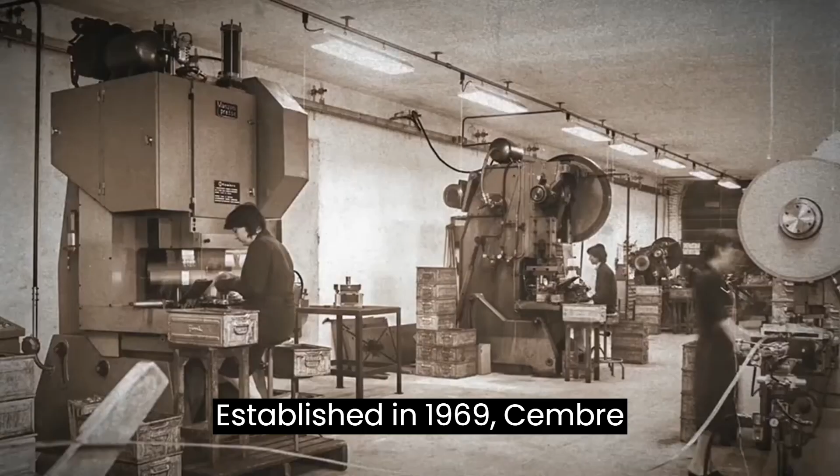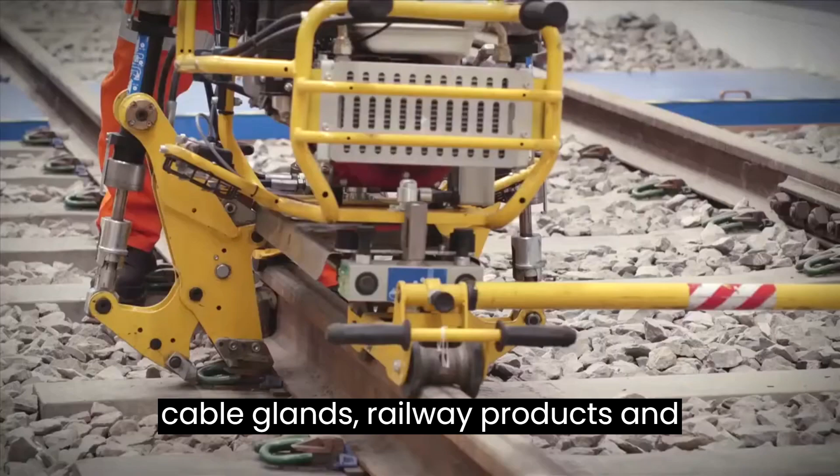Established in 1969, Cembre is today Europe's leading manufacturer of electrical compression connectors and related installation tools. The manufacturing program also includes cable glands, railway products and accessories, and industrial marking solutions.

The Italian plant, with its production units and offices, covers an area of 51,000 square meters on a total land area of 121,000 square meters. Cembre has been listed on the Milan Stock Exchange since 1997.

In addition to the plant in Brescia, a second design and manufacturing facility is situated near Birmingham, the second largest UK city in the heart of the Midlands.

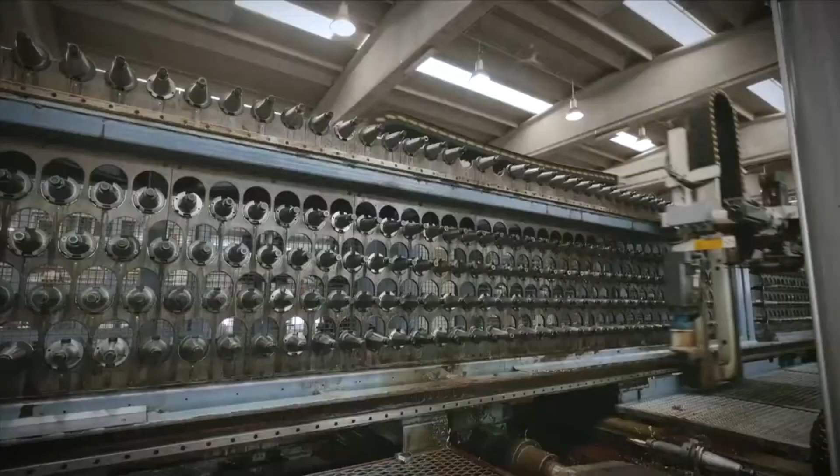Cembre Limited manufactures mainly for the national market. However, its high flexibility provides for all the group's subsidiary companies.

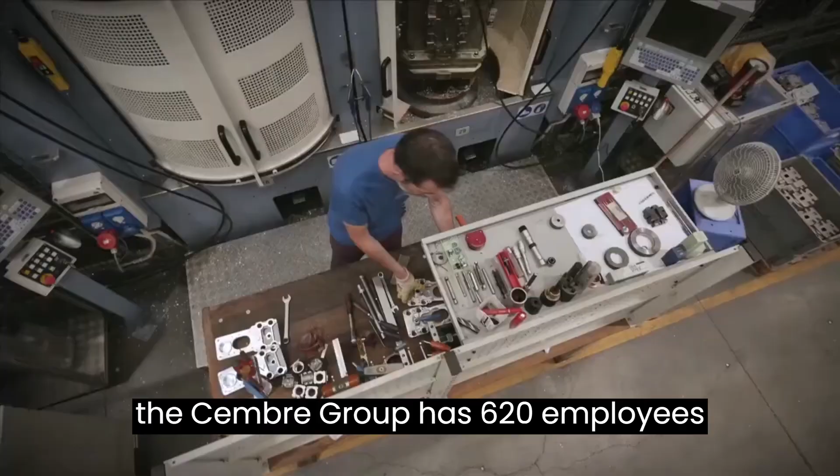Today, the Cembre Group has 620 employees in 7 companies, the other 5 being trading subsidiaries located in Paris, Madrid, Munich, Oslo, and Edison, New Jersey, USA. The headquarters in Brescia coordinates the business operations of the whole group.

Cembre engineers, designers and technicians work to produce not only the company's products, but also the equipment and machinery that makes them.

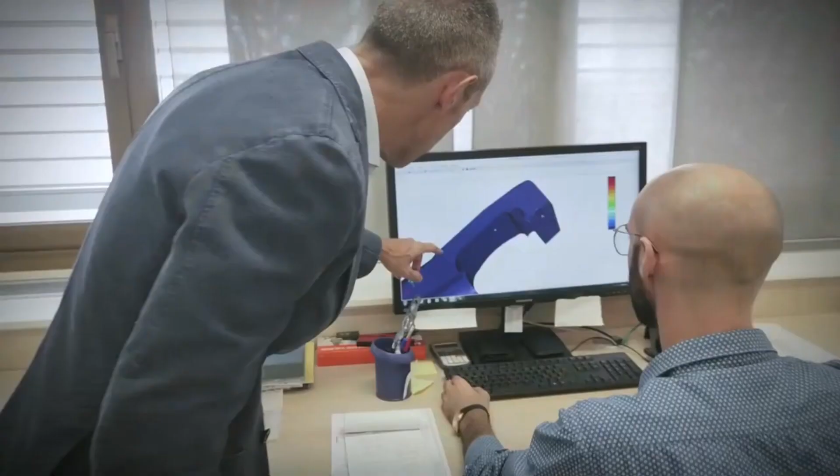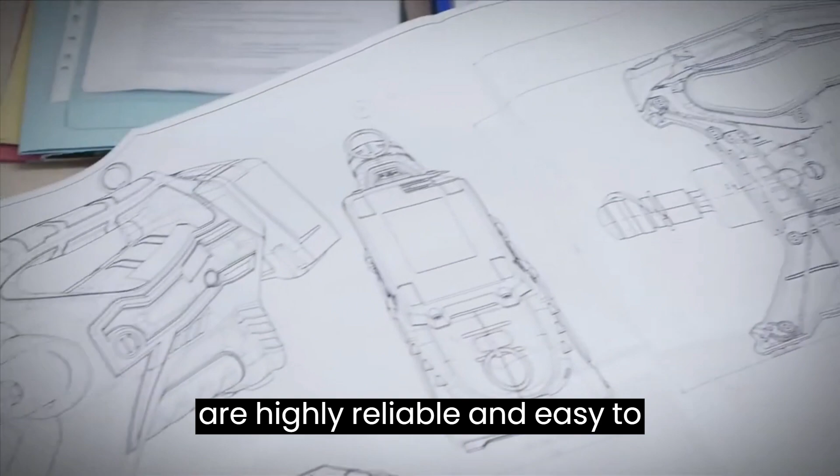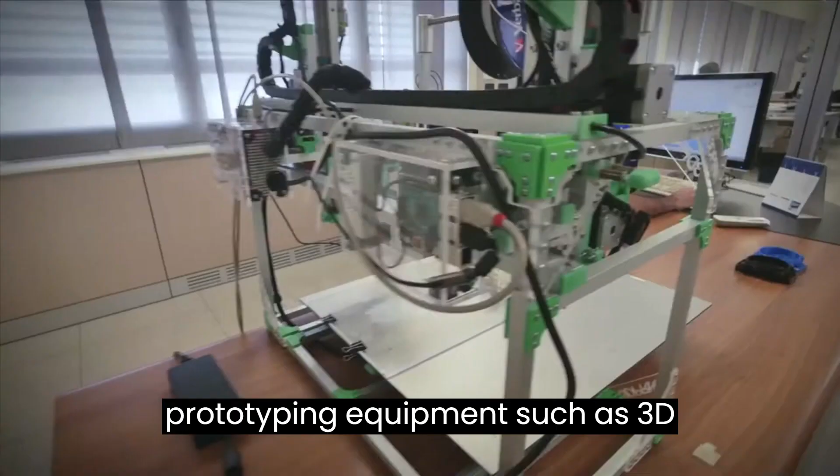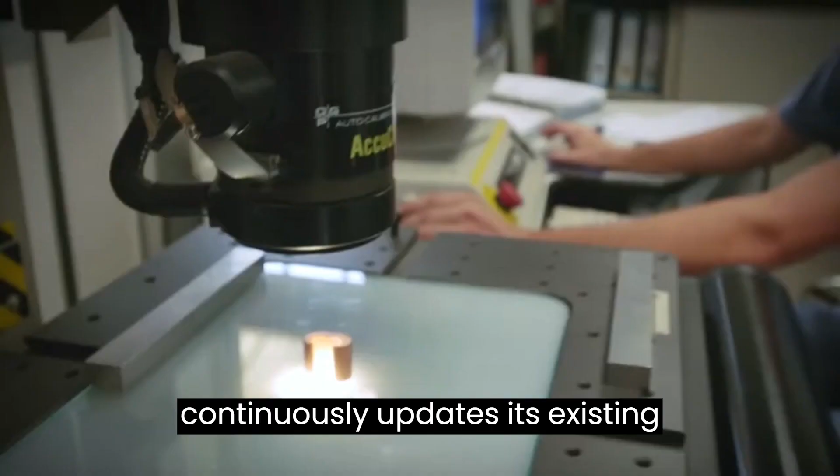Cembre's mission is the implementation of technologically advanced products that are highly reliable and easy to use. Cembre designers and technicians make full use of three-dimensional CAD, finite element analysis systems, and prototyping equipment, such as 3D printers. In addition to research activities focused mainly on developing innovative products for sectors with the highest growth potential, Cembre continuously updates its existing products to make them easier to use and more efficient in their performance standards.

98% of our sales turnover is based on our own product sale. We manufacture the first automatic rail disc saw machine.

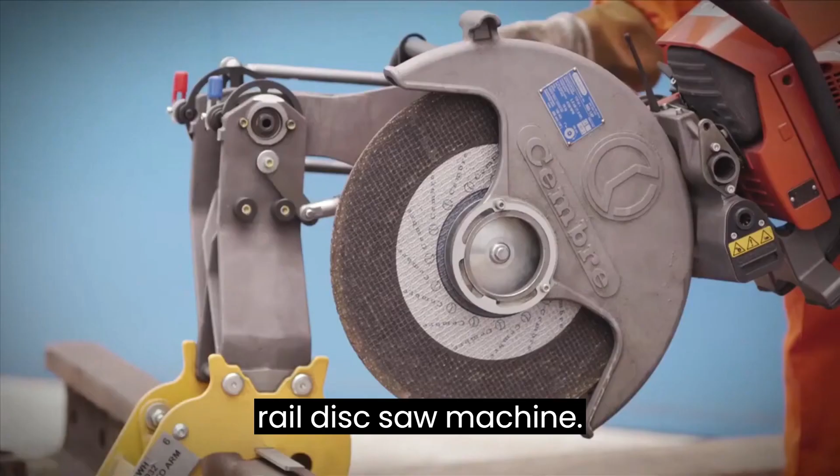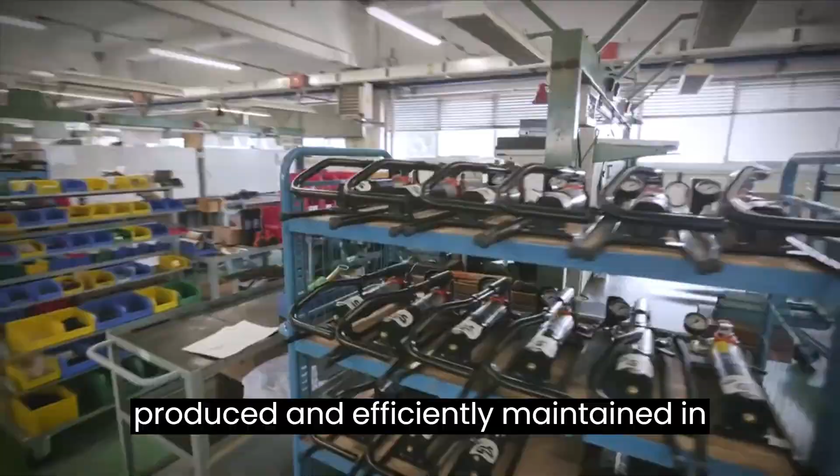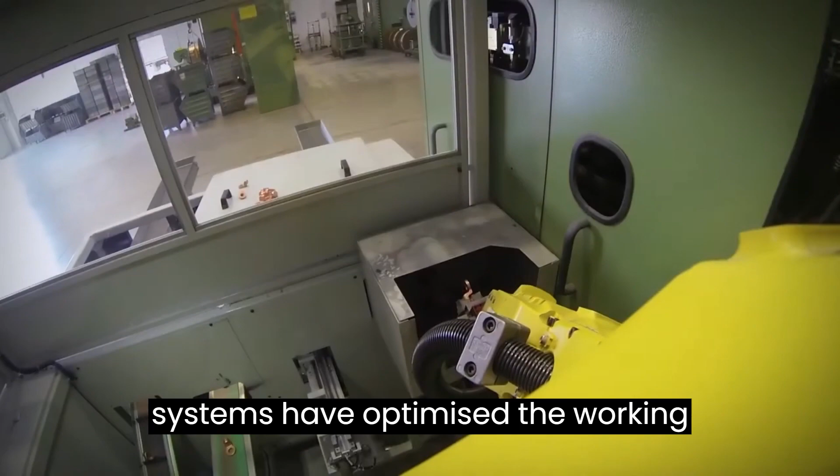Dedicated manufacturing equipment is produced and efficiently maintained in best condition in the tooling department. The study and implementation of dedicated workpiece positioning and handling systems have optimized the working processes, reducing time and costs and ensuring high-quality standards.

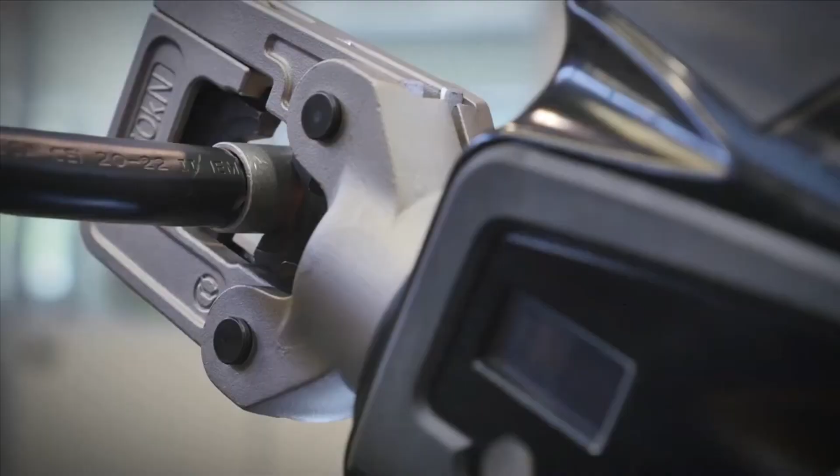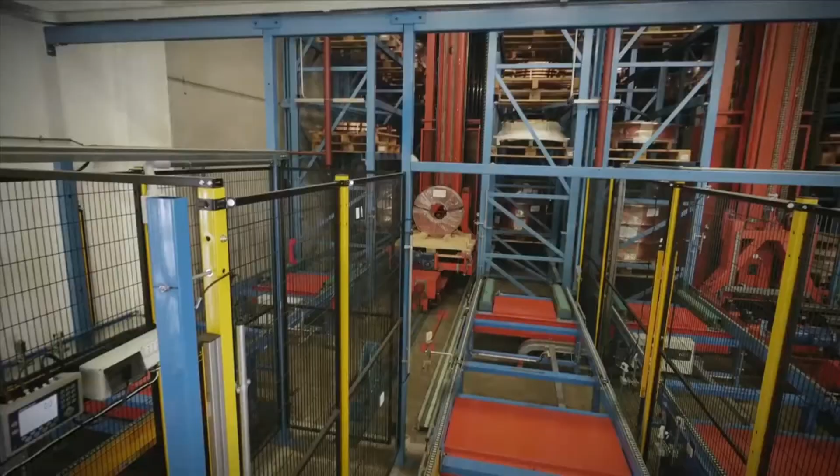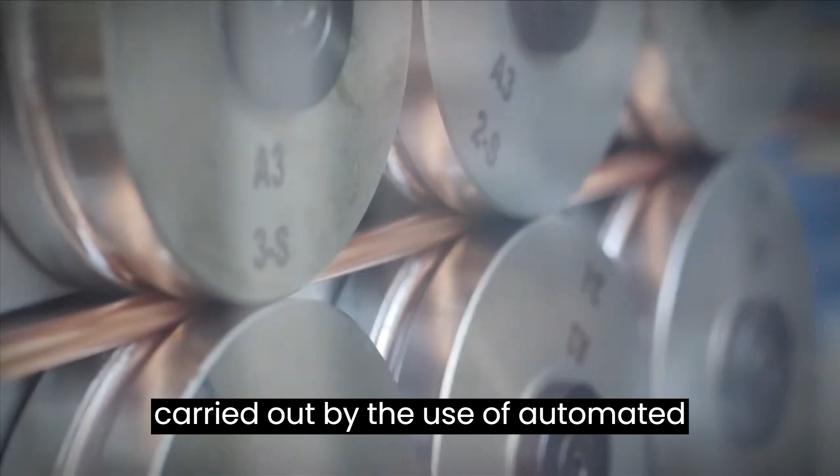High-volume manufacture of electrical connectors and cable accessories is carried out by the use of automated machinery, where high-precision dies produce up to 2,000 pieces per minute.

For the electrical connectors manufacture, only higher quality electrolytic copper is used, with a purity exceeding 99.9%, and aluminium with a purity exceeding 99.5%.

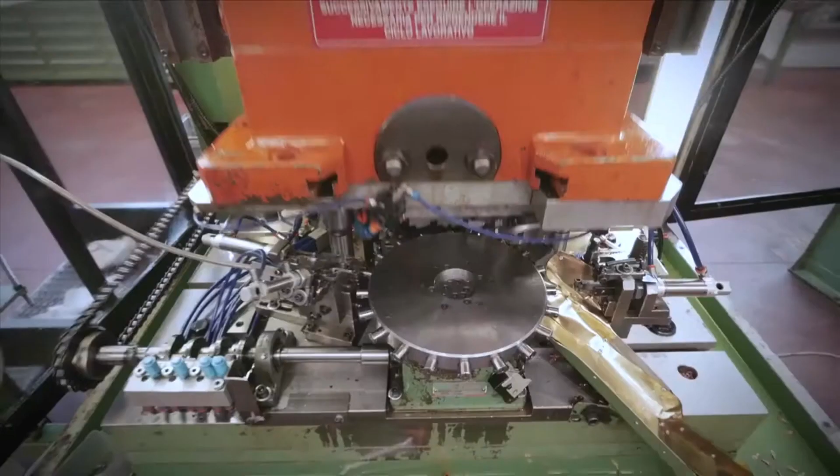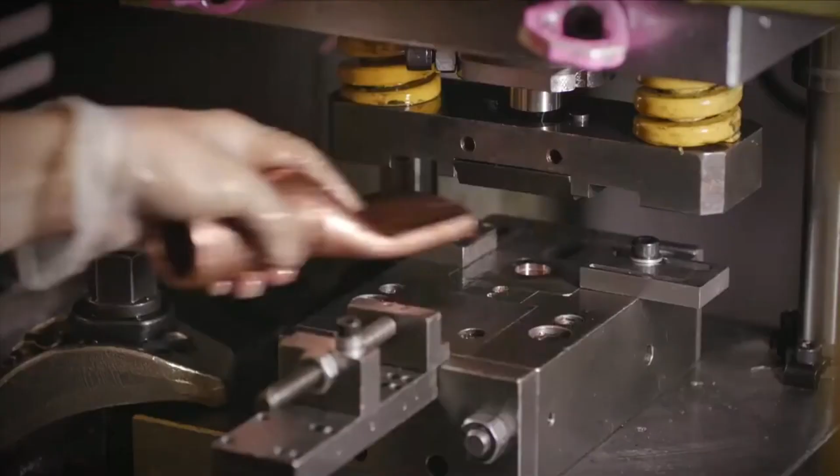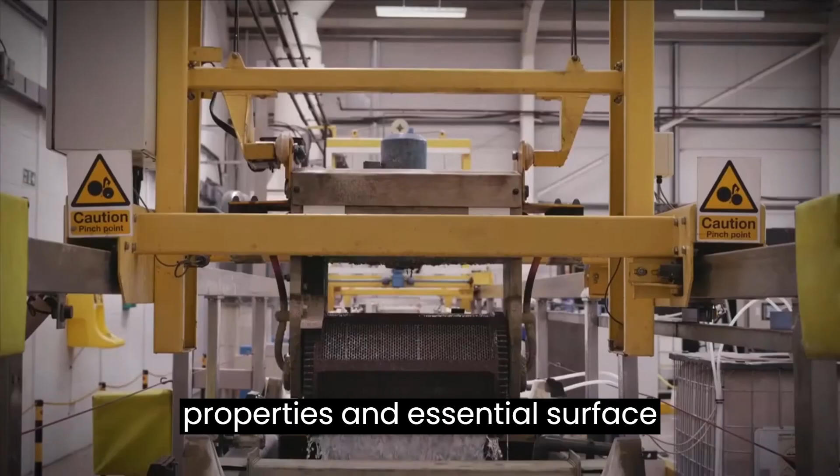The subsequent annealing and tinning processes ensure the correct physical properties and essential surface protection. The Cembre Group sells more than 2.5 million terminals every day.

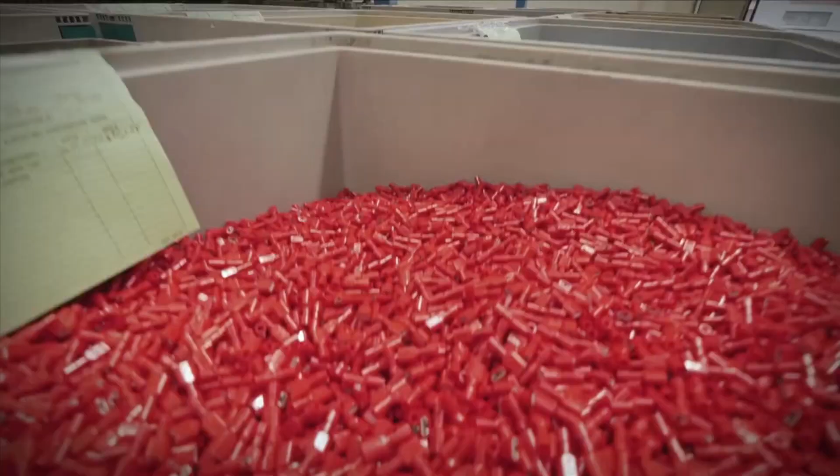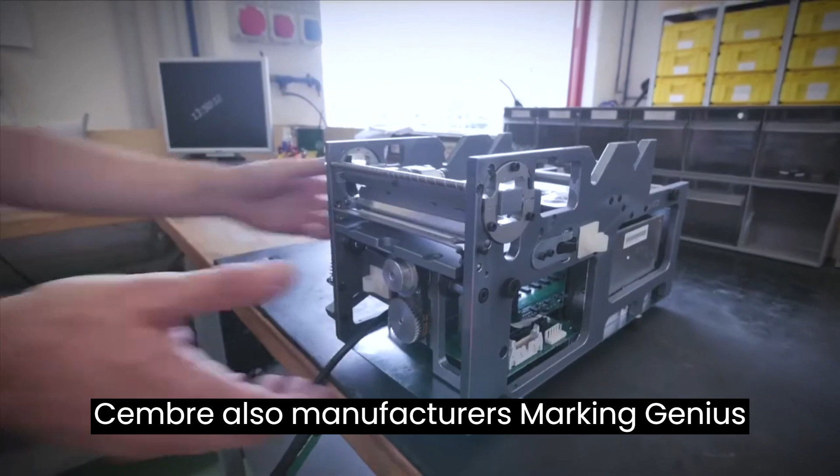In addition to a full range of identification products for cables markers, terminals, push buttons and components used in electrical panels, Cembre also manufactures Marking Genius MG3, a high-resolution thermal transfer flatbed printer, capable of unrivaled speed and autonomy in printing such a variety of products.

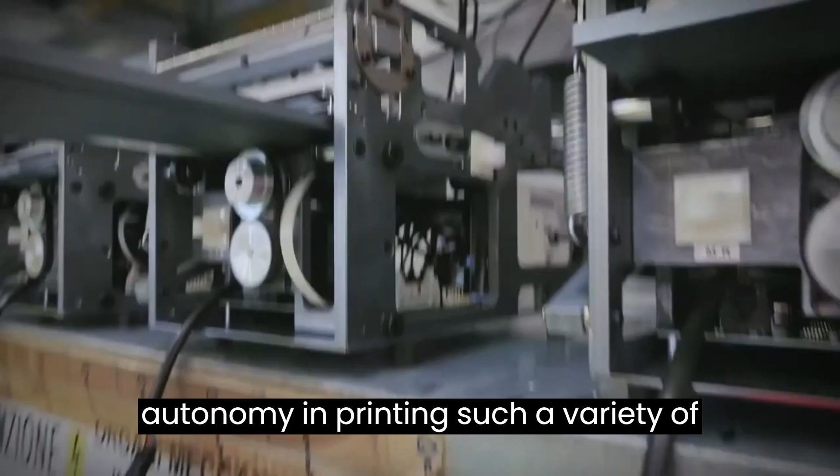We produce the world's most competitive industrial marking printer.

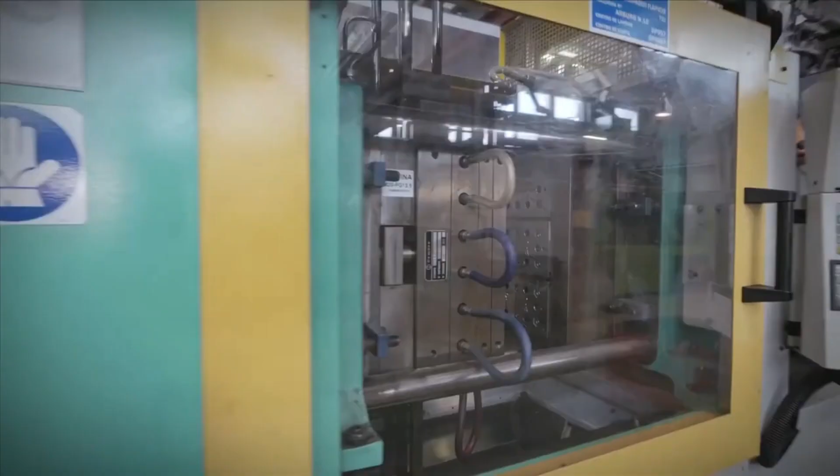Injection molding machines equipped with dedicated molds manufacture both seamless semi-finished products for connectors and tools and finished products for the industrial marking range.

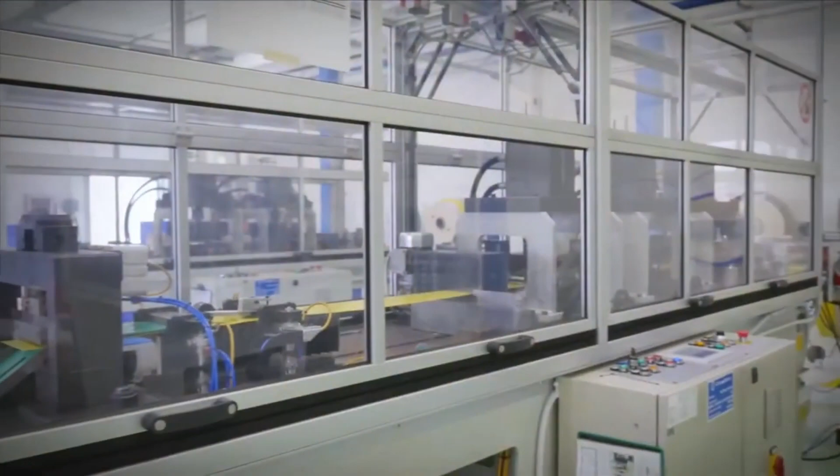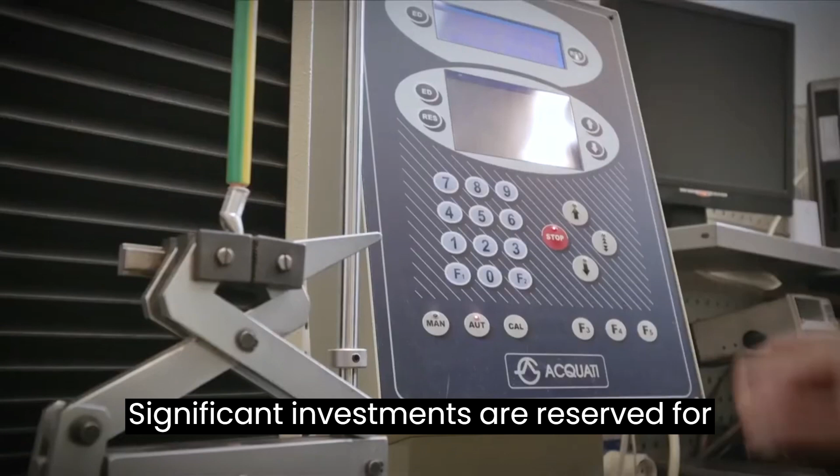Cembre puts high emphasis on all testing, researching and monitoring activities. Significant investments are reserved for laboratories and prototype facilities to support design, product development and monitoring of their characteristics.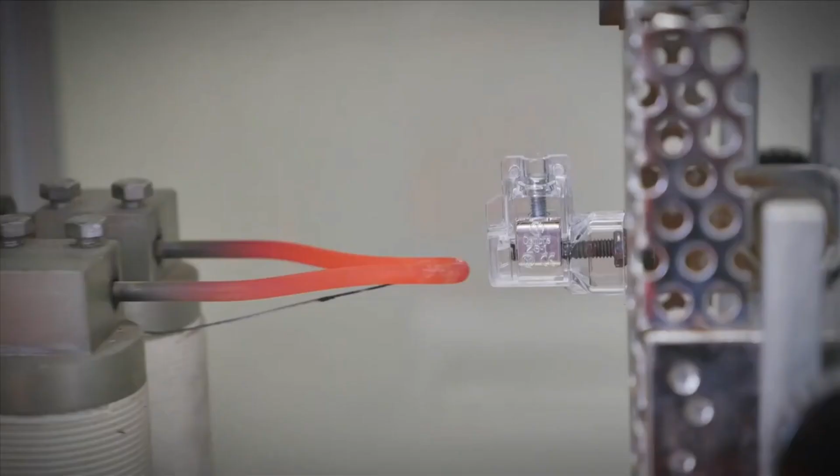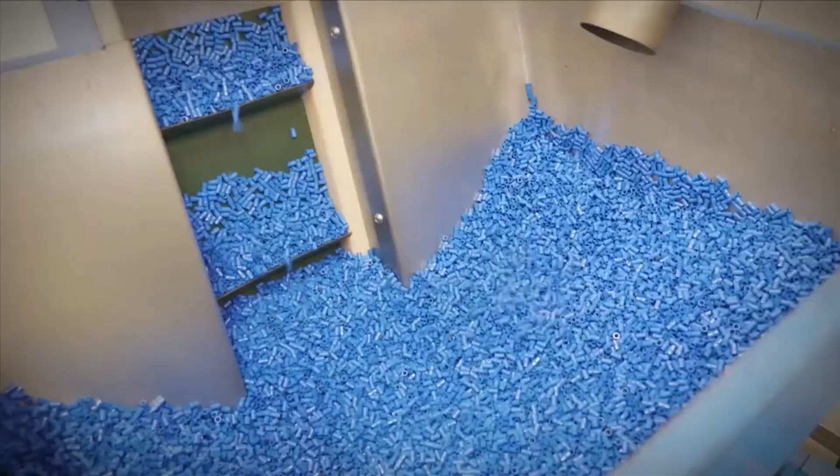The packaging of connectors is performed completely without manual intervention by automated machines. We work 24 hours a day to provide our customers with a fast delivery service.

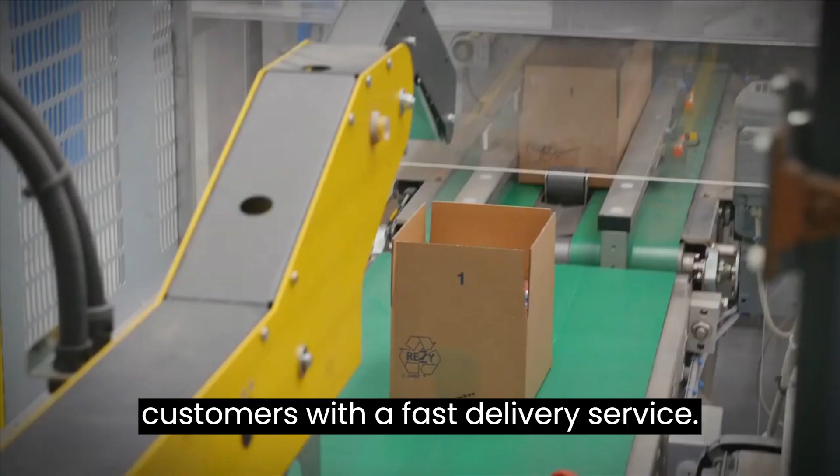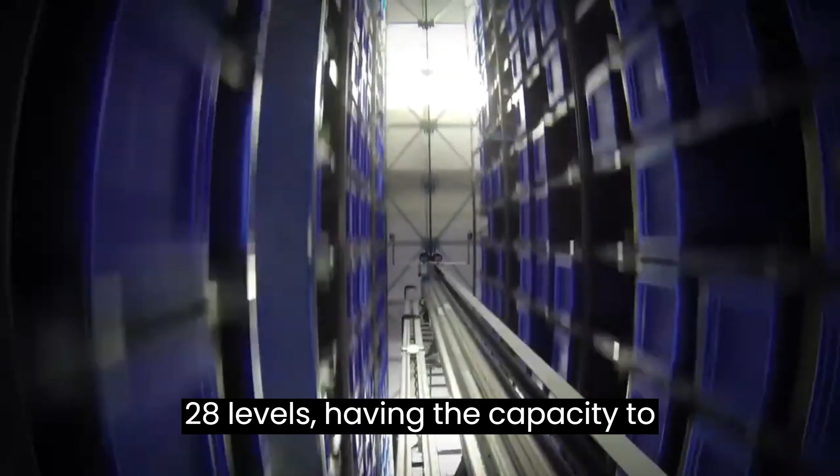The modular boxes are placed in cases and assigned to the automated warehouse, which boasts 16-metre-high shelving with 28 levels, having the capacity to increase from today's 44,000 cases to 62,000. More than 11,000 different product codes are sold every year.

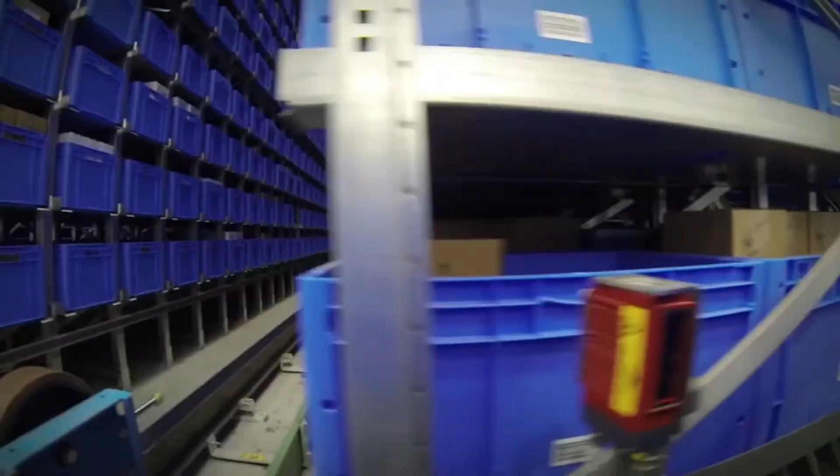The daily handling capacity at full operation is over 7,200 order lines, 10,500 ready for delivery.